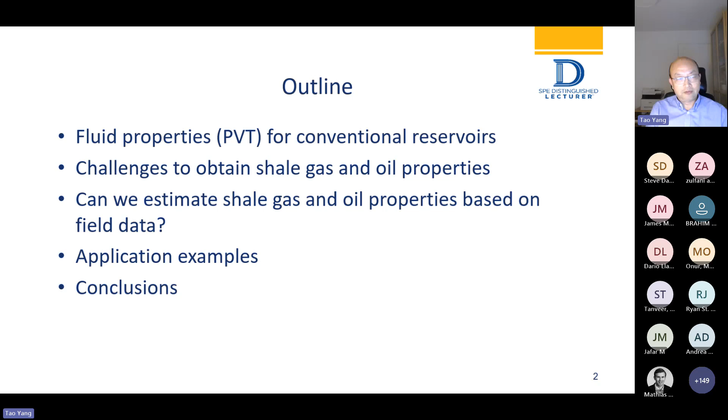This is a very interesting figure that was made in 2014, and the yellow part is the start of the revolution of shale gas and oil. When I was in the US, in 2012, we were just at this very steep increase. And this is the energy agency. They made an outlook about shale gas and oil, which predicts it will reach a peak in 2020 and will start to decline.

This number, can you see this number on the top? This is today. Instead of a plateau and decline, we're just continuously increasing all the way to 13 million barrels of oil. And it's amazing how the technology can really change the game.

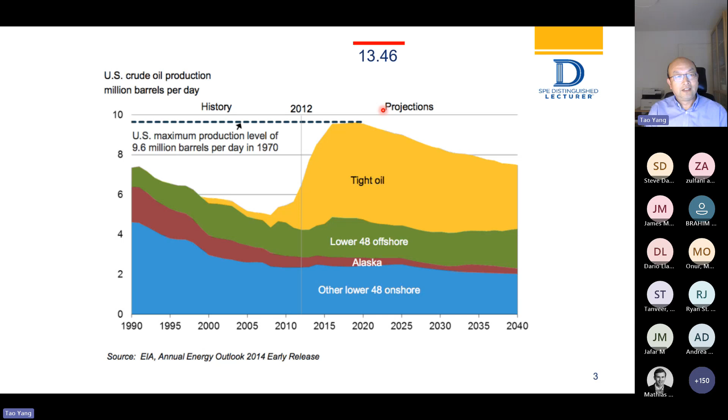Okay, this is in the old days when people were very familiar with the conventional reservoir and how you work on it. You do exploration, appraisal, and then you put the big money into the project. You start the development, you have a big investment, and your capital return is very long, many years before you get the money back.

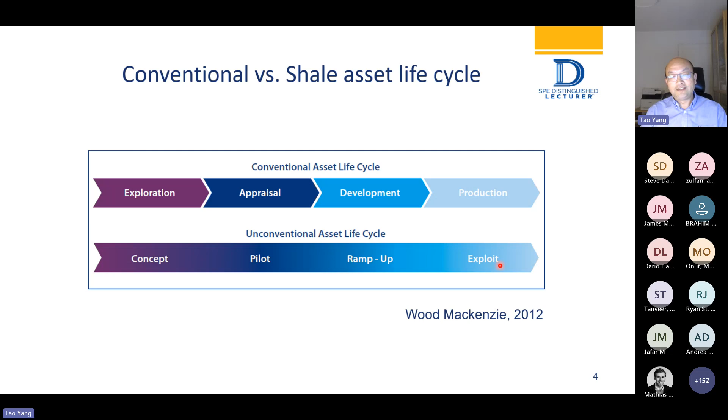Okay, and of course, in 2012, people started to understand that shale is very different. So you have a concept, you try, if it's working, you ramp up, and then you start to look for new. And this is a very different mindset, and it's working really well.

To come back to the basic description of PVT, this is the PVT guru Standing, and he actually made a PVT correlation in the 1940s. He said, if you give me the surface gas, surface oil, and the ratio between these two, the GOR, then he can actually tell you the black oil properties, like Bo, bubble point, all this stuff. And this is his work. His name stays in the industry because his work is really outstanding; we still use the Standing correlations, even after so many years.

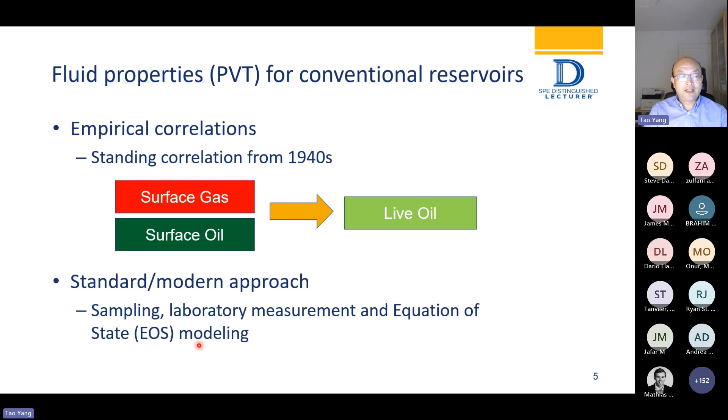But the modern approach, like Whitson's business, is different. Nowadays, the standard one for the conventional reservoir, you take samples, you make a laboratory measurement, or you make a downhole measurement, okay? When you have the data, you use the equation of state model to match everything and make predictions.

And for the shale, you don't really take an in situ representative sample. It's very difficult. Some people try, they take the whole core out and try to find something. And the PVT data also is not very many. And the geochemistry, we have to really give a big acknowledgement to the geochemistry work.

Because the fluids are not really moving around, this gives the geochemist a super opportunity. Their prediction on the shale in the big area is always right. So this really made a big contribution to the so-called shale gas and oil revolution in the US. But when you come to the small area, especially for your well, you have to be very careful. And not only for one well, but for the small region.

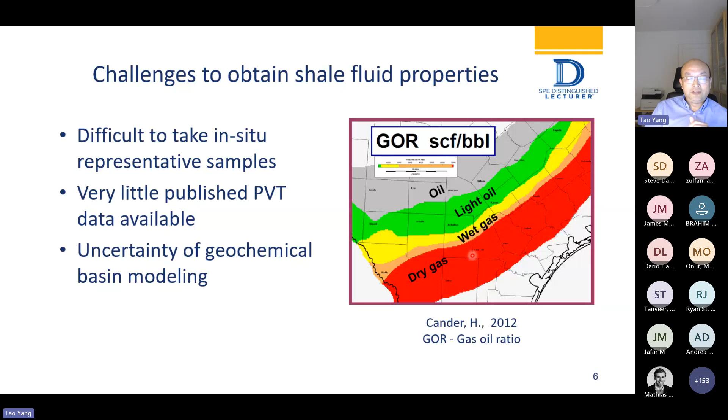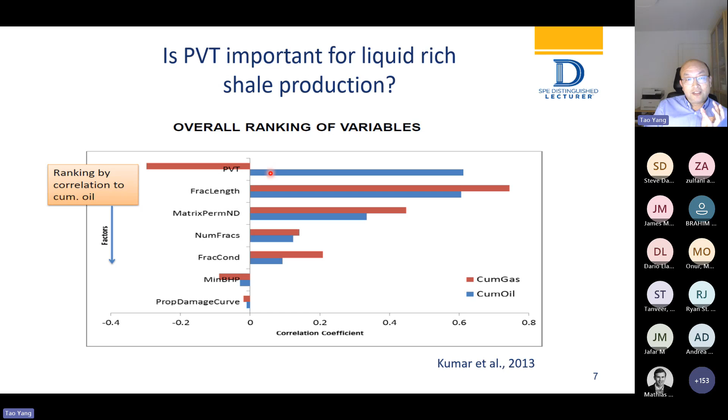This is a reservoir engineer who made a simulation work. Of course, all the people focus on fracture length, matrix permeability, fracture numbers, and all this related to hydraulic fracturing. And he shows that PVT is actually rather important in this tornado chart. This ranking shows you, especially for the oil. If you have a dry gas, it's actually a negative correlation. If you want to look for oil, the condensate, this is a very, very important thing you need to know.

As I mentioned, people want to take the in situ representative sample, and some people use a pressure core. They take the whole core out, wash out the hydrocarbon, and combine it with the released gas. This is one approach, a research type, I would say, not really a standard industry practice. And Whitson is heavily involved in this one. So basically, you can use a model and historical data to back calculate what the original fluid actually is.

And if you look at the research domain, over 90% of the publications are talking about the nanopore size, what is the impact, how much they change the bubble point pressure, dew point pressure, and it's a good activity. But when it comes to industry practicalities, that's still very difficult to apply. So this is the main question that we're going to address in this presentation.

When you have no PVT samples, no measurement, and only some field data, the field data I mentioned is like you have some GOR, you have some gas data, surface gas, okay? Can you use this kind of limited information to estimate the PVT of the reservoir fluid?

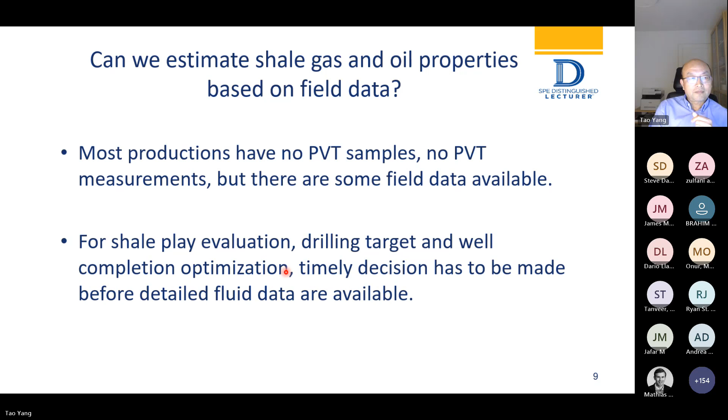So when we have all these unknowns, especially in 2012, that's 10 years ago, what we did is look at Eagle Ford very, very carefully, and we did a very thorough study. Not all the shale reservoirs are undersaturated, and Eagle Ford is very much undersaturated, which is positive if you look at the initial fluid samples.

And we take the samples. I have a co-author for the paper, Jamie, he was the manager in Statoil by that time. He really supported this. And we did the measurement for dry gas, gas condensate, volatile oil, black oil. We did all of this stuff.

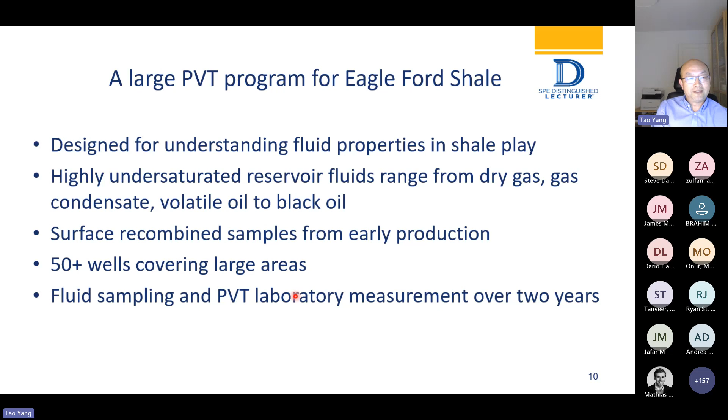And then we looked at all the early productions. All the samples were taken from early production in 50 wells. It's easy to talk, but difficult to do, because it actually took 2 years to have the result. Before I moved to the US to take on this job, Remy already started to order all these samples and PVT measurements. He basically put all the reports on my table and said, can you find something from all this measurement?

We did quite a thorough analysis for all the 50 wells. This is the most fundamental one we usually do: you look at the characterization factor, which will tell you how many fluid systems are in a reservoir. They're not exactly the same, but if you draw an average in the middle, it's plus or minus 1%, which is like a measurement error. So basically, we assume they have the same fluid in the entire Eagle Ford. Such a big area is actually only one fluid system.

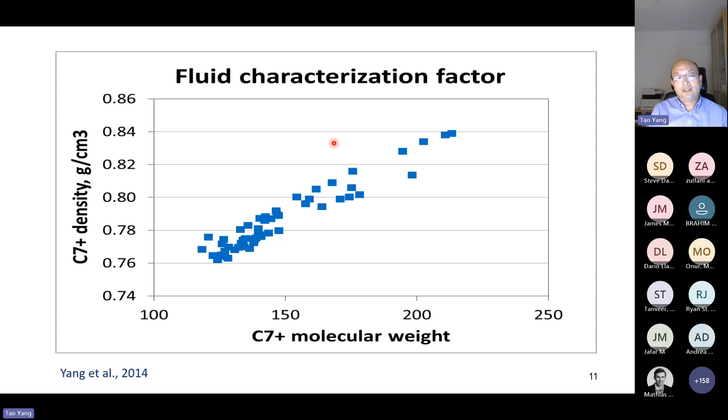And we look at the GOR and API correlation. GOR, especially for gas condensate, is not within plus or minus 10%. You don't see them on the same line; they spread around. And you see that the higher the GOR, the API starts to increase, which means you have a lighter and lighter fluid. Then, crossing over this line, when you have very dry gas,

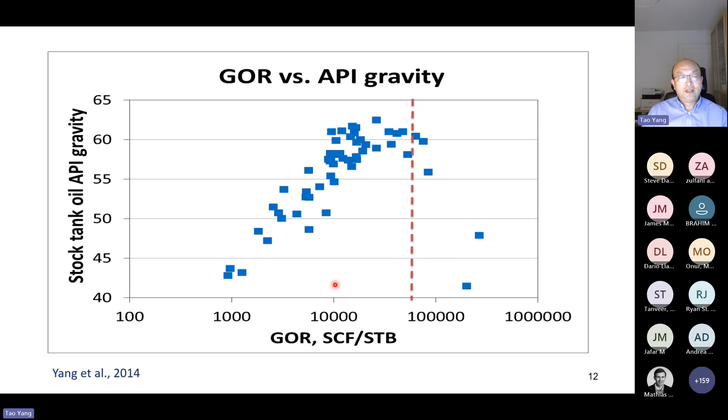dry gas, you don't have condensate. You have some condensate, which is a wet gas, very high GOR, and you start to see the API actually start to drop. I have an example I will show you of why this happened, and this really helped us with the business decision. But put very simply, the higher the GOR, the lighter the fluid, except for the very high GOR region.

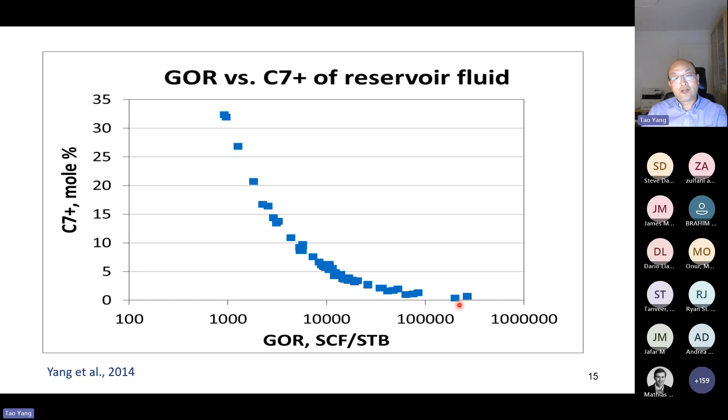So what we find out is, not always, you have to look at the geology, but for Eagle Ford, it's only one system here, a wide range, and they cover all the different fluids, and if you know the GOR, basically you know everything. If you have a GOR, you can actually predict the composition, C1, C2, C3, all the way to C7 plus. You know the API. So why do things become so simple?

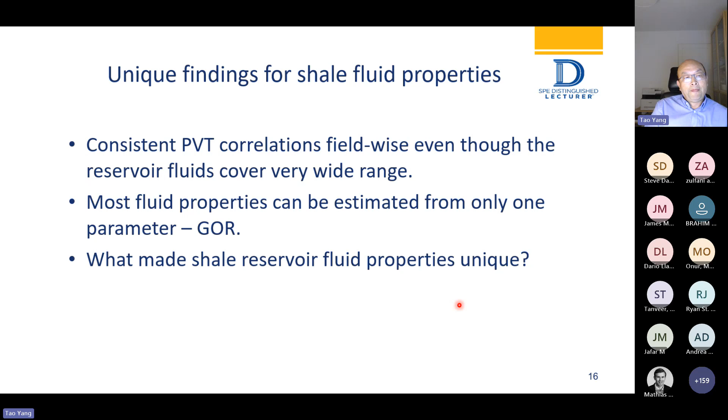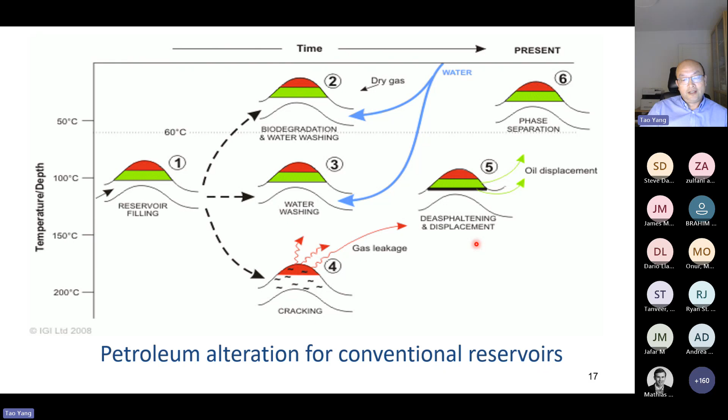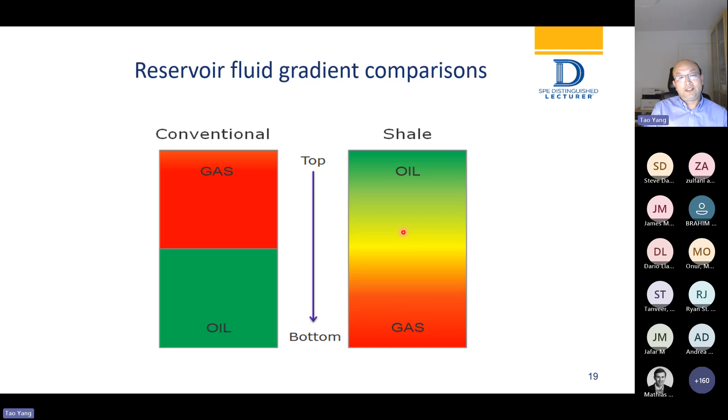As we've seen from Eagle Ford, the shallow part is actually the oil, and the deepest part is the dry gas. It's because of the temperature. This is very much a thermal maturity driven process. The gravity segregation doesn't work here at all. You have a continuous change from oil to gas. Some shale reservoirs only have half, like Marcellus; they go from gas condensate to volatile oil and they finish. They don't have anything like a black oil. Eagle Ford is very special. It's such a good learning case.

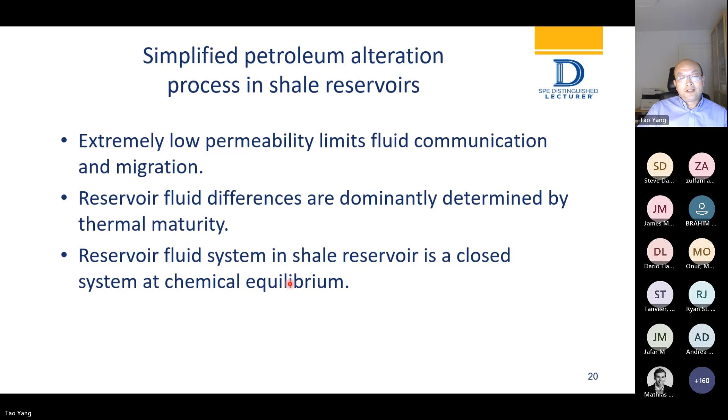So I already talked quite a lot about this: extremely low permeability limits fluid migration, and the thermal maturity, basically the temperature, is the main thing that decides how the fluid composition changes. The theory of why this happened is the chemical equilibration in a closed system. This is why Calsep, a Danish company, started to make a model to predict the composition if you tell them the temperature.

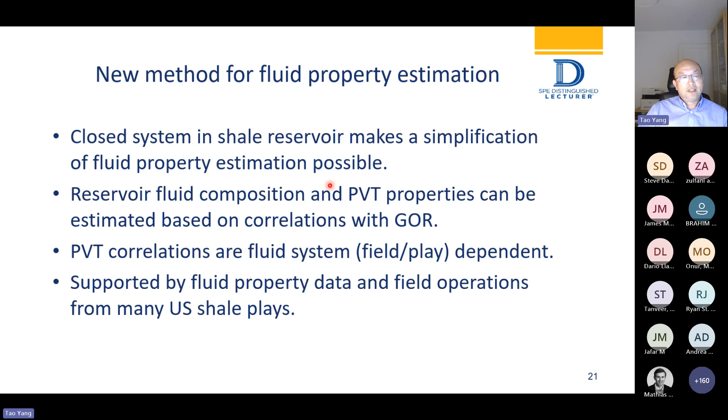So this is the conclusion. If we want to estimate the fluid properties, we need to know the GOR. If we know the GOR, then we get everything. The question is how to get a GOR. There are some differences compared with my original slide, which is the dark blue color. Before production, the only thing you have is the mud gas. During drilling, you have the mud gas released, and this you can use to get the GOR.

After production, you have a lot of data. You have GOR data, you have API, you have surface gas. All of this data can be used to get your GOR. And this is drill cuttings, and this is something new. That's the one I will volunteer to do for the second distinguished lecture next year. They will send me the schedule next year in April, and I will know where I will go.

This one is quite popular because, same as the mud gas, they're always available. If you look at how many drill cuttings we store in the warehouse, it's like an IKEA furniture shop. Many buckets. We have cuttings for thousands of wells, for Equinor, same for other companies. If you can take the small stones back, crush them and measure the GOR, this is fantastic, because a lot of people don't even know what the reservoir segment is, what fluid is inside.

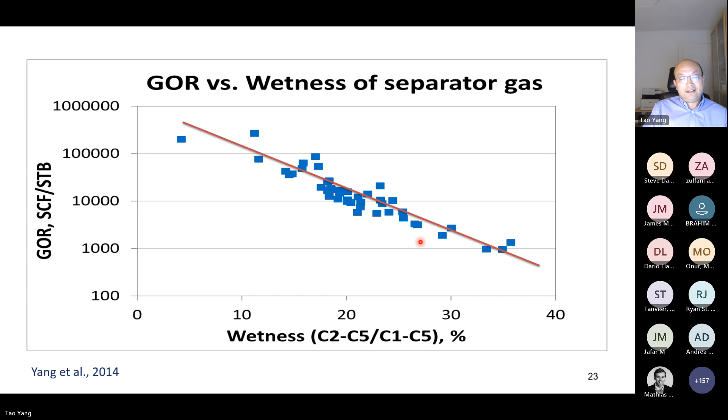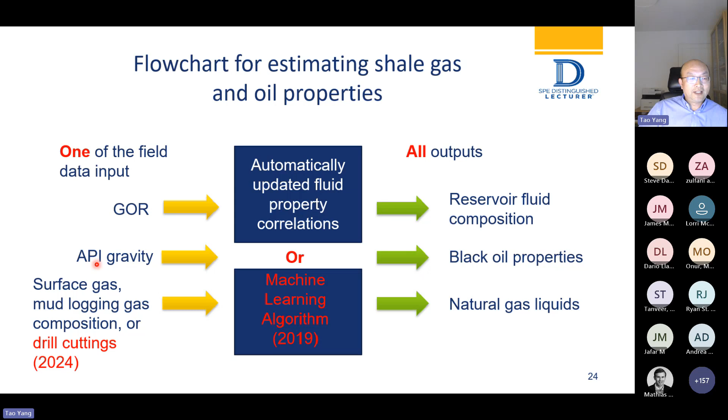And I mentioned that when I came back from the US to Norway, we started to work on conventional reservoirs, which are a lot more complicated. You can't draw a straight line anymore. So that's why we started to use it. We became very early digital pioneers. We use machine learning to solve this. You have a big database, you use machine learning, and you can actually go from the left hand to the right hand.

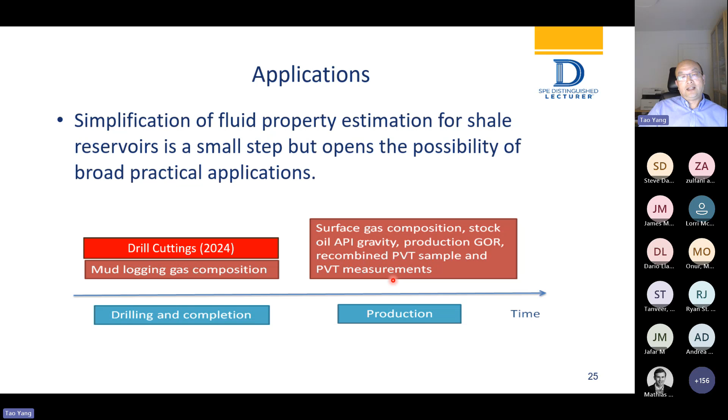So these are the applications, and I will show you 3 examples. Basically, you have a kind of timeline here. This is before you start to produce, and this is after production. Before, you don't have a lot of things. Basically, you have mud gas and the cuttings. These are the ones you can use. After production, there's a lot of things you can use. As I mentioned, you can use separator gas or API and get all the properties you need.

The first example is separator gas, and this one is used so much because the number of wells in Eagle Ford is so big, and the production engineers need to do their simulation, and they need a composition for all this production simulation. So it's very important. All this network modeling needs a composition. So where to get this composition? The live oil, live gas, not the surface gas. So here, the surface gas is the input, and the output is a live fluid.

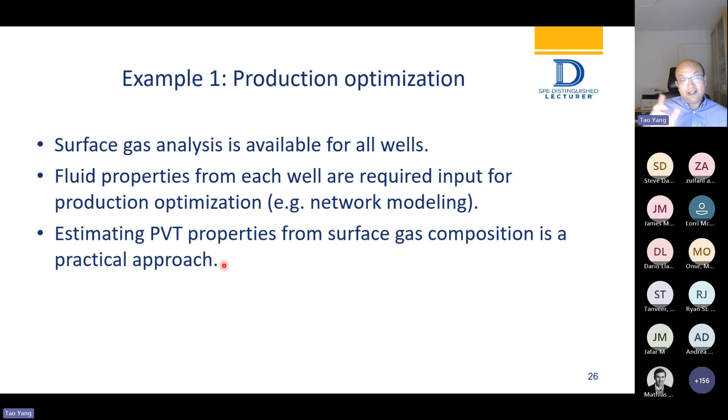This is the kind of input. This is the separator gas. In this example, you get a very dry, very lean heavy part, and then a lot of C1, right? And then you use a correlation. It's Excel based, very simple. My colleague Yang is an expert in coding all these plugins in Excel. He just built the data, used our database, built all the correlations, and we input this one. We can get the well stream composition, and we can estimate the PVT properties: saturation pressure, API, GOR, formation volume factor.

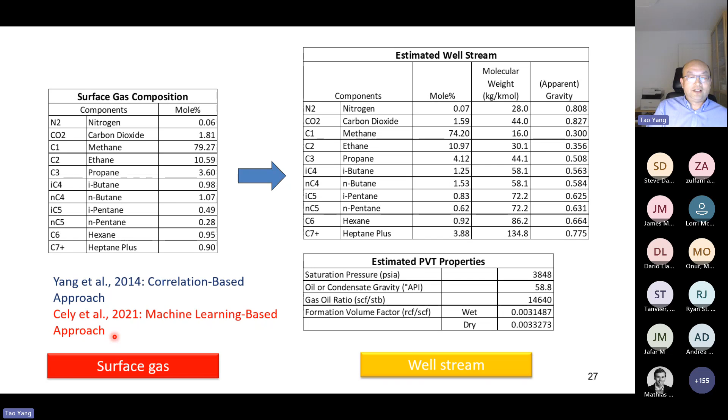And my colleague, Alexandra Cely, in 2021, improved this one. The reason we use machine learning is not because it's fancy. It's because the conventional reservoir is more complicated, and with a machine learning model you can handle more parameters instead of just drawing the correlation in Excel.

This is what people actually talk about most for value creation. This part is very important because before people complete the well, the PVT will have a big impact, and usually we don't have the PVT information. We have only the geochemistry basin model. As I mentioned, it's a good model for the area, but not for your single well. It's very important you verify. You use a data-driven approach, not just assume something. So mud gas really starts to make a difference.

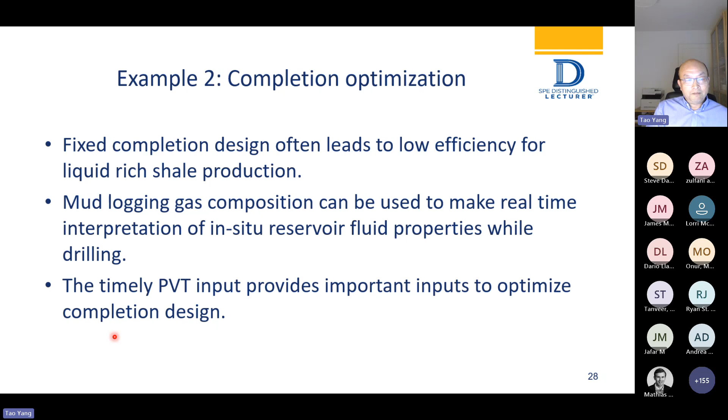And this is the work in 2014. And this actually became a starting point, and we started to do a lot more. We built the machine learning model into this, and we extended it to conventional reservoirs. And this approach, we gave a name. We call it real-time reservoir fluid identification.

The main reason to call it real-time is helping the well decisions. And this one went to the front page of JPT. And also we were quite honored to get the 2022 Digital Solution Award from World Oil.

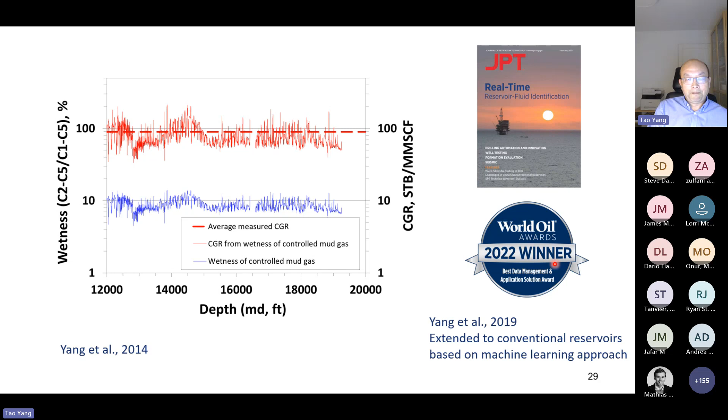This is the last example. It's about buying things. Before you buy something, you have to make a quite thorough evaluation. And when you buy shale, you have to make sure. And Eagle Ford, when Equinor bought it, we'd been told it's quite rich, a lot of condensate. When we started production, quite a lot of the area we bought produced nothing, only dry gas.

So it's very important, the condensate yield, that's the most important. Of course, it also depends on your shale. If it's a black oil, that doesn't mean it's a good thing, and you might not produce anything. So it's very important to have that in mind.

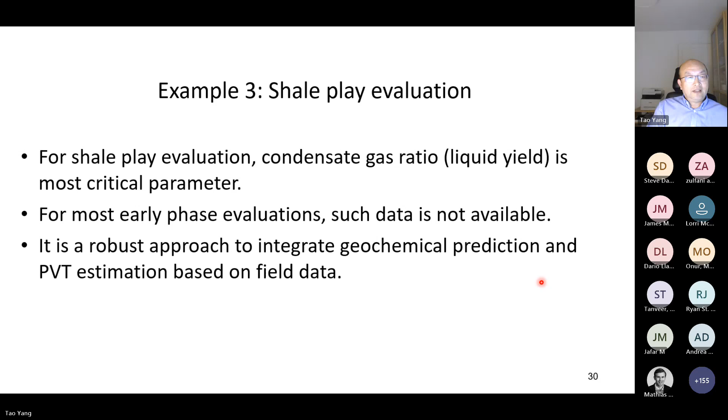They assume this is oil, but when we do this work, we actually have some separator gas data. They don't have good PVT samples at all. And we look at the separator gas, look at the wetness, and it's rather gas. This is a gas-prone kind of prospect. So that's why we told our people this is not a good thing to buy, because they want to buy liquid rich. And we also have support from the stock tank oil analysis.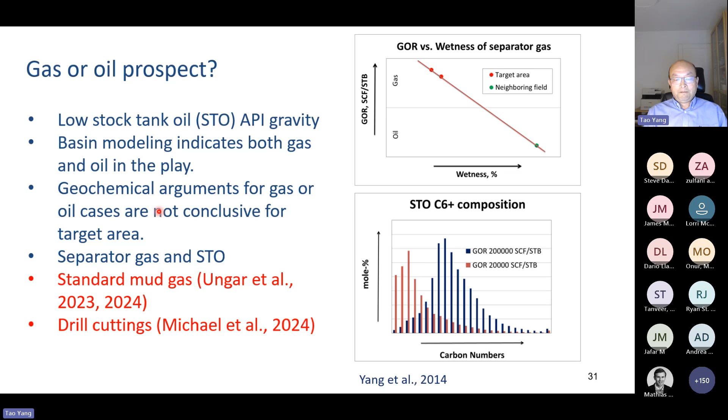And if you mix all these different data, it's pretty sure you can make a much better decision than people just using a geochemistry basin model. I'm not saying the model is not good. It's not good for a very specific well or a small area. That comes with these limitations.

And if you use the field data, mud gas, drill cuttings, all these new things I talked about today, they are not as good as PVT samples, period. Very simple. Because if you have a PVT sample, you can make a very detailed compositional analysis, a property analysis, and you get everything you need with very small uncertainties. Using these new methods, you don't. But it's a trade-off. The new methods offer you opportunity.

You can get the fluid properties anywhere you drill. And versus how many PVT samples we have per well: usually you have 1 or 2 with a complete full PVT measurement. So this is quite a small number. If I give you a big number, like a picture in Norway, like Equinor, we drilled 5,000, 6,000 wells over 50 years' time. And how many full PVT analyses did we do on PVT samples? It's only 2,000. It's very little.

So in a way, you have accuracy and you have availability. So I think we try to use all the good things. You don't want to use the new method and predict some property and overwrite your good PVT measurement. But on the other hand, for the area where you have nothing, all these new methods will help you to make a data-driven decision rather than just assume something.